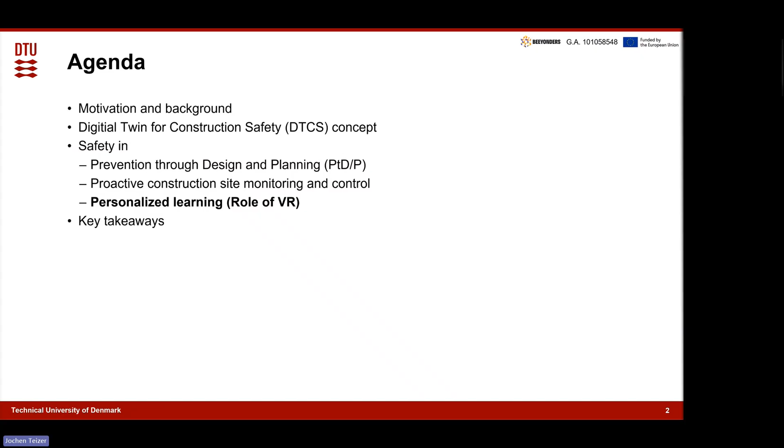Agenda. I go a little bit into motivation and background. Then I introduce the digital twin for construction safety concept, because virtual reality is part of it, where we have three main components. One is prevention through design and planning, where we design out hazards. The second part is construction site monitoring and control, and we want to do that proactively. And not last but not least, maybe it's actually the first, we want to do personalized learning, and here virtual learning environments can certainly help us perform change. I think I will go into that. And then at the end, I have some key takeaways.

Motivation. Well, we all know that safety is very important, especially in construction. The construction industry is one of the worst industries to work for, since its work environments are very complex and very dynamic. Many of the accidents that occur, and I cite here the OSHA Fatal Four, it's falls from height, struck-by injuries like being struck by a load from above or from workers, being hit by a machine, caught in between, let's say being in a trench or other hazardous or confined workspaces, and electrocutions. And the list can go on and on and on.

The industry, as well as research, has focused a lot in the past decades on lagging indicators. These are recording safety statistics, basically reacting passively upon happenings. We call them incidents, and these incidents are being followed up with. But it's too late—somebody got injured or even killed. It's simply too late for us to take proactive measures.

And that's why the industry has slowly moved towards looking into close calls. That was about 20 years ago. Close calls—recording also events that almost lead to an injury or fatality, and preventing those. And even now, the focus is continuing to be on high energy control assessment.

This means watching out for the impact of the force that hits a worker eventually. And the reason why this is shifting towards high energy control assessment is simple: we haven't reached the zero accident goal yet. You can see this here in the bottom of the curve.

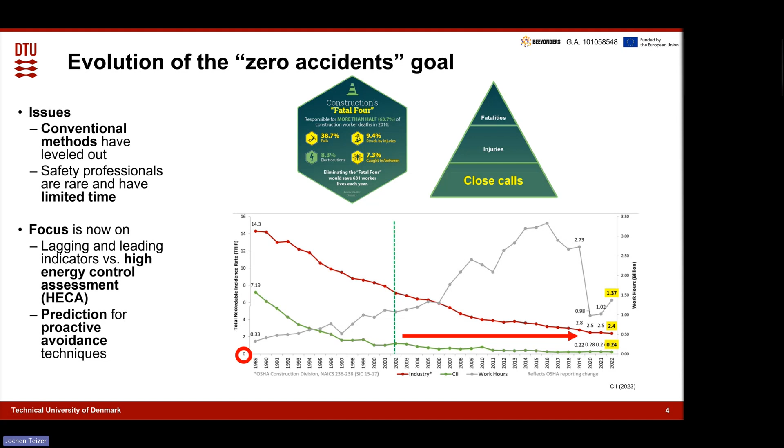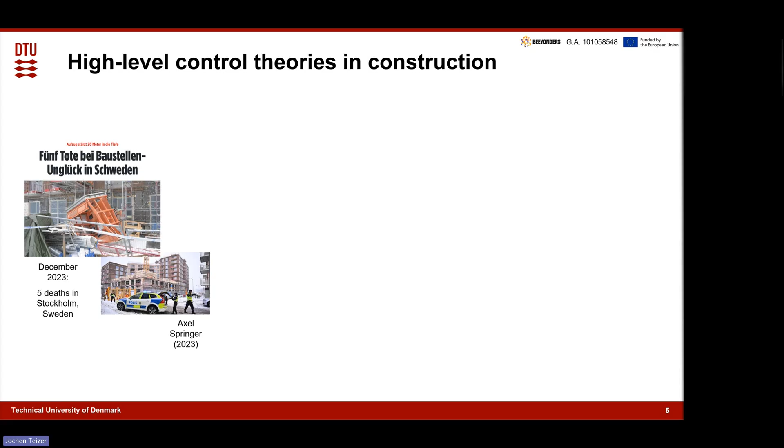Anyway, so that sets the base. I give you a couple of examples of accidents in the Nordics—well, actually also one in Germany, almost the Nordics. The Nordics are performing typically very well in safety, even though the construction industry is relatively small. But tragic events happen, and things have to change, right?

Typically what the industry applies is the high-level control theories. They have been around for 30, 40 years now, and they basically say we need a cultural change—the CEO at the top approving and going all the way down to the worker level, providing safe worker training and safe site conditions.

And yet it is not where it should be, and that's where I added this layer of protection. You may think of these as slices of Swiss cheese, and each hole in the slice actually is an incident. The further you go down, these incidents decrease because the holes are covered. But yet, so far, as you have seen in the statistics, we haven't achieved the zero accident goal.

And I'm a firm believer—that's why I introduced about 20 years ago this level of digitalization. Reason had not foreseen that; he stopped at personal protective equipment, down in the hierarchy level at the very bottom on the site. But I believe digitalization can add another layer of protection, not erase all, but certainly assist us. Virtual reality, or training with VR, is a part of digitalization, where I also state that digitalization is seen as an enabler, but certainly not as a replacement of human skills.

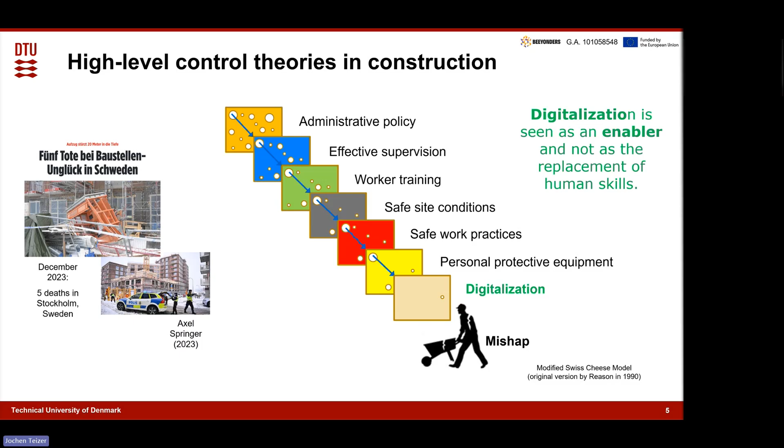So workers will not go away for the foreseeable future, probably 50 to 80 years. Yes, we will have automated construction sites similar to a factory plant environment that we see in the automotive or airline industry, but workers will always be there to assist. So we have to make those highly progressing work environments safe even when robots and other autonomous systems are in place, which is what BEYONDERS targets as well.

BEYONDERS has a teleoperated autonomous wheel loader, and here we have to take care and apply protective measures so workers don't get injured or killed.

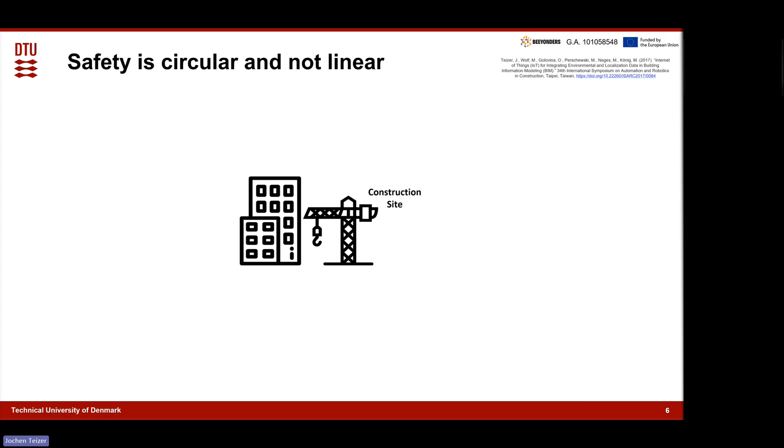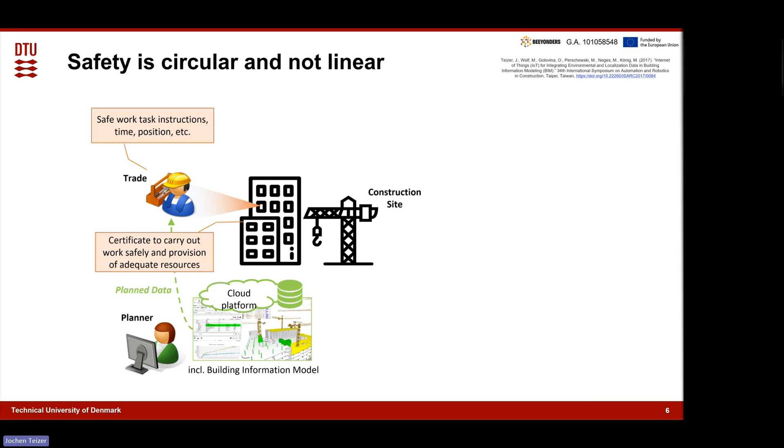Now, we have a construction site, just to introduce the framework a little bit. I'll do it quick, but we typically plan digitally on construction using building information models. Some of you are familiar with that. That information stored in these building information models can be given to trade workers. They can instruct them, and they can work accordingly, hopefully safely, on time, on schedule, with high quality.

And yet, even very modern construction sites have mobile devices where things can be reported, either the work progress or safety hazards. There's a well-known software company from Denmark that provides such easy-to-use mobile devices. You can see these are typically manual devices where you have to enter and fill out a form online, which is reported and linked to the BIM model.

Very nice, but still a lot of stuff happens manually. And yet, even though it's manual, the construction safety management or the construction management benefits from information that previously was not digitized or has been reported from the field, which is good.

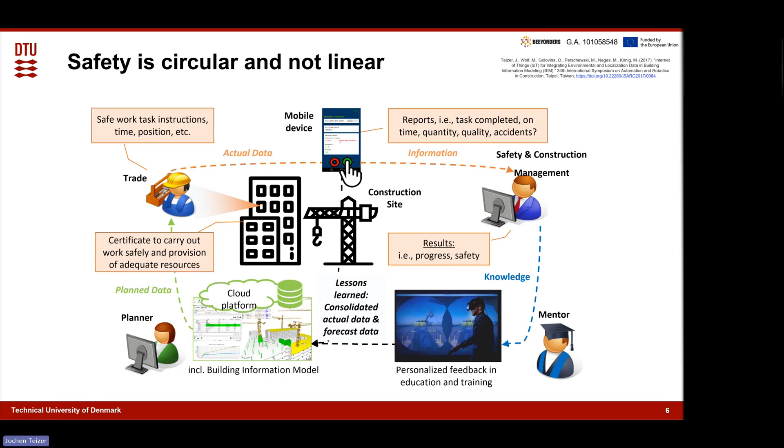And yet we're missing one important piece to round up the circle of information, because we want to go circular, right? Circular not just based on sustainability and materials, but also in terms of the flow of information. We also need to think about how we can advance learning environments, especially for construction safety and health and well-being. There are really good opportunities to close the loop and provide consolidated feedback that relates to the project, based on progress. I think that's a very good pathway to close the loop of information and make sure the next design of a building follows the lessons learned from the previous work sites.

I'll make it brief because I will show some examples. There is the digital twin platform that consists of 3 to 4 components. I think 2 of them can actually be combined. So let me talk about them individually.

One is very important: following the prevention through design and planning principle, which designs out hazards that we know usually would exist in the field. I will focus here on fall protection when I go into the examples. That could be almost seen as applying virtual reality, but not quite. But again, we design out hazards before they appear in the workplace—that is proactive in the design and planning phase of our project.

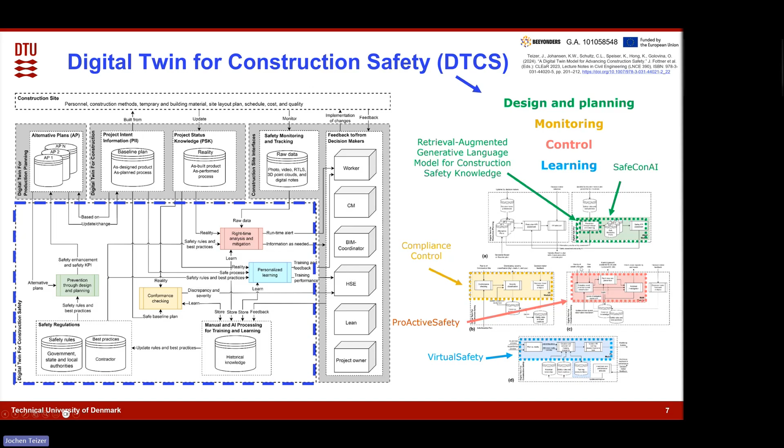Likewise, we have done in BEEYONDERS with some of the participating partners in building and road construction. I go into the first phase. Typically that's what you see wherever I travel around the world - I take photos of construction sites. That one I took in New Zealand.

People have, of course, a risk assessment and perform that just before they execute work. Here you can see they actually write down what the hazards are and how to mitigate them. And yet they use a physical board on the job site that is posted on the fence so everybody can see it, even visitors like me on a job site.

Again, there's an expert in place that does it. Typically, that person has a lot of knowledge versus the workers who once in a while get training. And again, that's already a bottleneck. We should probably provide them with more training and feedback than just once.

So here we have it - here we have a construction project. We have several stakeholders involved, in this case the workers and the safety manager, and they have domain knowledge, in particular this person here, and they need to apply rules and regulations. We can analyze them and put that into the digital representation of the job site.

And the term building information modeling came up already. I mean it's very early when we talk about BIM and safety. Actually, there's not that much safety in BIM that I wish there would be. But typically, if you follow this process here, we could create a digital representation of the work site before we start working. Let me give you an example.

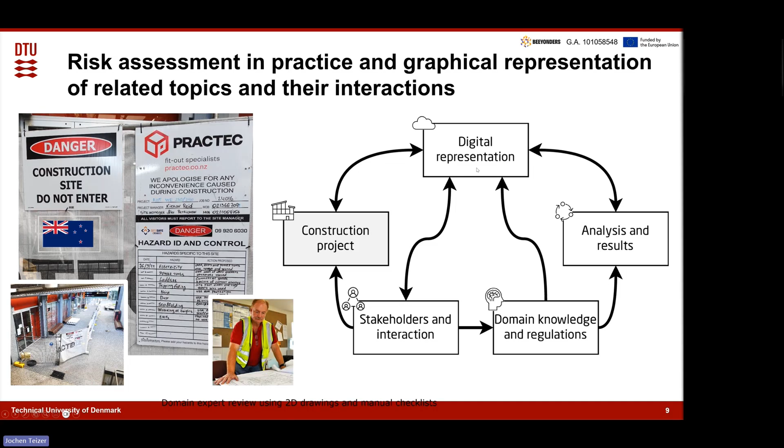Here we have the typical regulations on fall protection. There is code that we can code according to the regulation. For example, for a hole that is bigger than 5 centimeters, or for a leading edge on a work phase where you can drop almost 2 meters or more, you should install fall protection - a cover, a guardrail, or whatever. And it looks like that.

It depends on which country you are in. In the EU regulation, it would look like that, but in the US it would look slightly differently. Again, this may relate to international projects. Some of you have it, maybe some of you don't, but it may also add to confusion for the workforce that is traveling throughout the world.

Let's say in Europe, we currently build the Fehmarnbelt tunnel link between Germany and Denmark, and the workforce is 80% from Eastern Europe, most of them actually from Poland. And I believe they have very strong safety regulations, but when they come to Denmark, they may not know those in detail, even though both are in the European Union. So here updates would be useful.

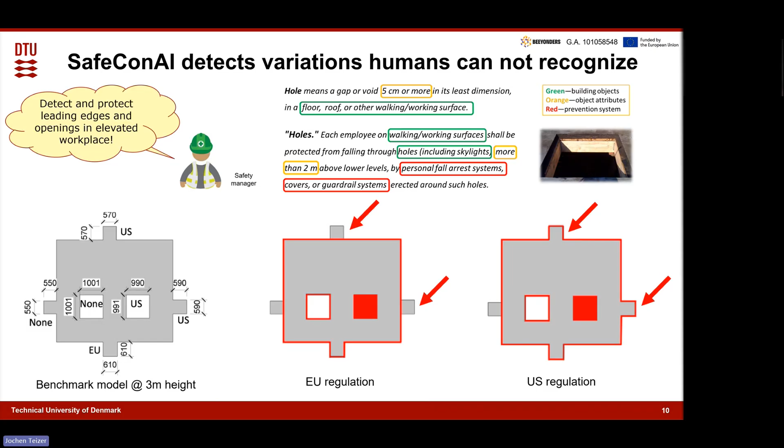Now let me show you what BIM and safety means in the prevention through design and planning phase. On the left, you see a BIM without safety. On the right, you see it. We simply run our code checker, our safety rule checker on the BIM model, and it creates the guardrails.

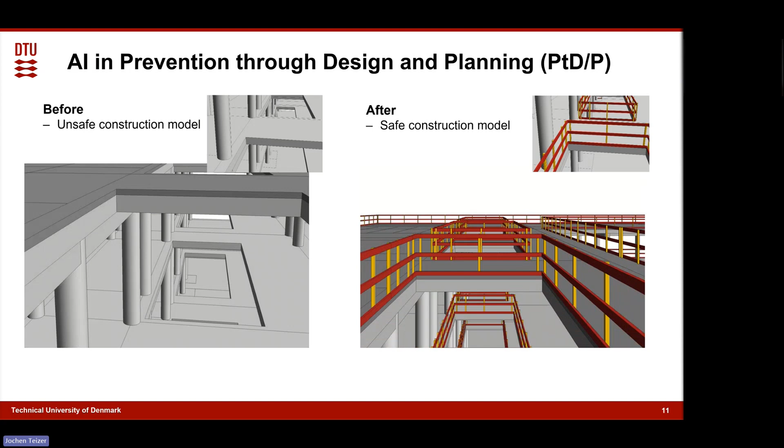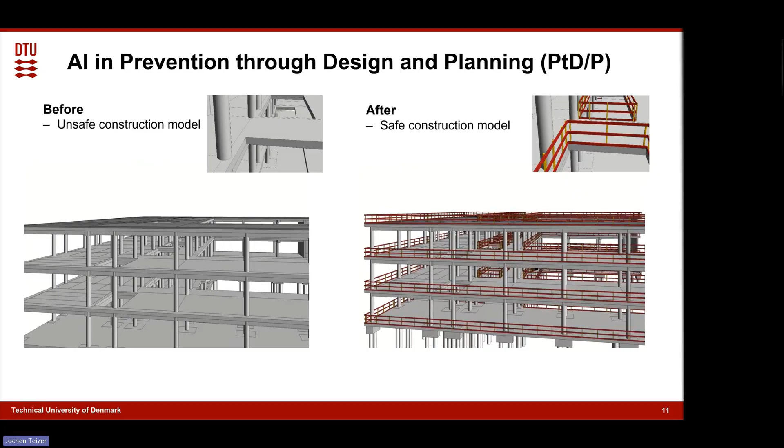That's it. And you can import that into the schedule. It provides a lot of value already about where and how to protect leading edges in this particular case. Once you tie that to the construction schedule, you see a bunch of things going up - this is actually the 7-story building going upwards.

But at the same time, we can tell you in what part of the schedule, the construction schedule, the guardrail needs to be implemented. They're saying red needs protection. And likewise, we can measure a KPI on the total length of guardrail.

Likewise, we can create alternative schedules, like a baseline plan using one crew. It would look like that, very uniform. If you add multiple crews to speed up your production, you actually would get such a schedule, and even that one could be optimized.

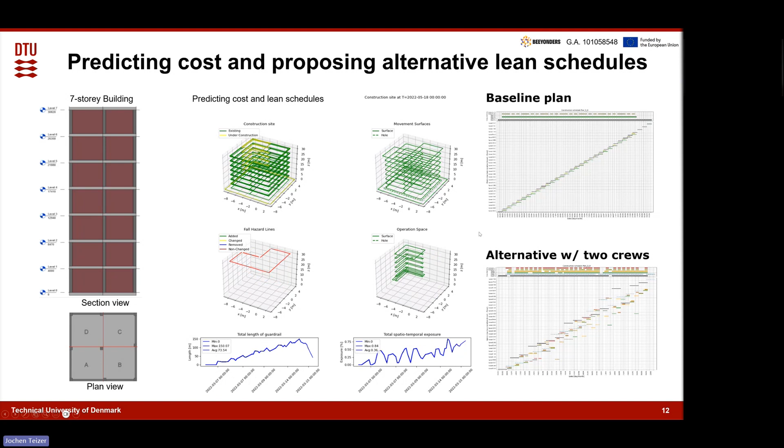So we have tools in place that can create not only a safe construction plan using BIM, but also a safe schedule. These are two important ingredients because we use them later on in our virtual reality-based training.

The SafeCon AI, I mean, we could call it AI, this very famous term, artificial intelligence. But here we have a tool that allows you to actually draw information from the digital twin platform and figure out, has it actually been installed as planned?

You can see it here. We left it usable for humans. Somebody draws by hand in this wearable device: there should be something, I'm missing something. So I've identified and located that position. Once you hit submit, it will find that safety element that is there.

Even though this is augmented reality in this particular case, it also relates to the extended reality concept, where you try to give people in the field feedback as they requested. So this is drawing information from the digital twin platform, indicating that here is a guardrail element missing.

By the way, all of these experiments were done under supervision, so none of the students that actually developed the technology gets harmed. You can see here there was a scaffold just below, just in case somebody would get close, that would be a protection for them.

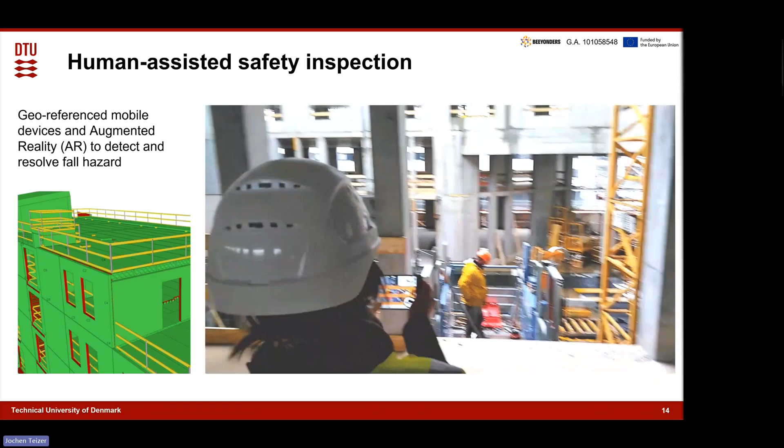Okay, good, this is really good stuff. If you think going away, flying with drones, everybody likes that. I hope people don't do bad things with drones. But we can actually record information, and this is done with our partner in the BEEYONDERS project from Finland, Fira. You can see here we fly with drones.

We create point clouds, and these point clouds get analyzed by computational algorithms. We created at DTU to figure out whether these elements are in place or not, and yes, we can do it. For example, here on the left, we can see there's a guardrail element missing, there's the toe board missing, and there's the top board missing.

And that was implemented with live tests on a job site, again safely conducted. But when you fly with a drone, to make it brief, you can create point clouds from stitching all the photos or videos you collect, and analyzing these point clouds and linking them to your safe-designed BIM model allows you to figure out where modifications occurred or don't align with your model. Really cool stuff.

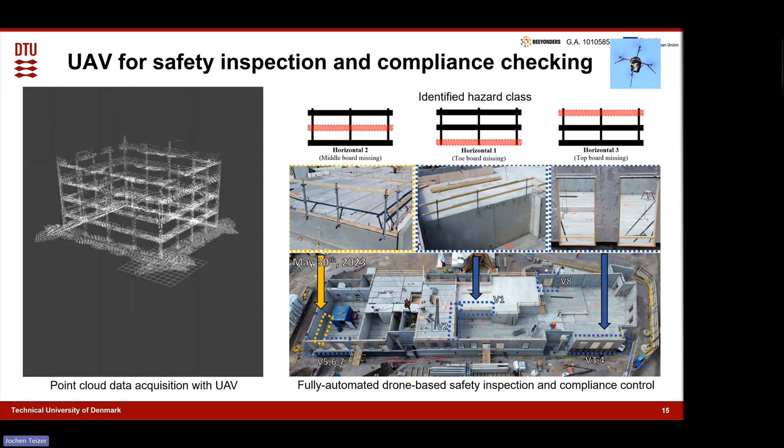I think that's ripe for a startup company that does that professionally. We would be happy to participate or share and collaborate with you.

Showing you a little bit what we do currently on our campus, similar to what we are doing in BEEYONDERS. We actually fly with drones. These are so-called Hoffmann blocks in Denmark, where we separate walkways from machines. Again, aligned with the BEEYONDERS project, our goal was to figure out whether these Hoffmann blocks are all in place where they should be, so we have a safe BIM layout.

That's the plan view of it. You see here the container, or the temporary offices on site. There's a walkway, and everywhere you see these dashed lines should be Hoffmann blocks. Again, this is drawn based on a BIM model, so don't think this is just a made-up figure. Actually, this is the plan view of a BIM model, the site layout plan.

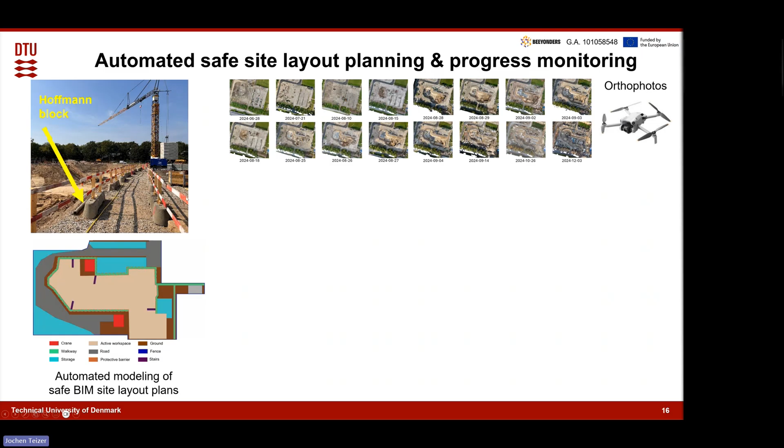Then we fly basically every week, at least once. And surprisingly, everybody loves to look at these images because they're so detailed, and yet nobody has the time to actually figure out how many Hoffmann blocks, protective guardrails, are in place to separate pedestrian walk patterns, walkways, from vehicles.

And here we apply our algorithm using labeling, standard techniques, it's not really that difficult. I highlight here a bit more where we see these Hoffmann blocks automatically detected. And as the excavation progresses, we see that they add step by step more, or modify them. This is existing technology, at least our algorithms. Again, it could be moved to the next level.

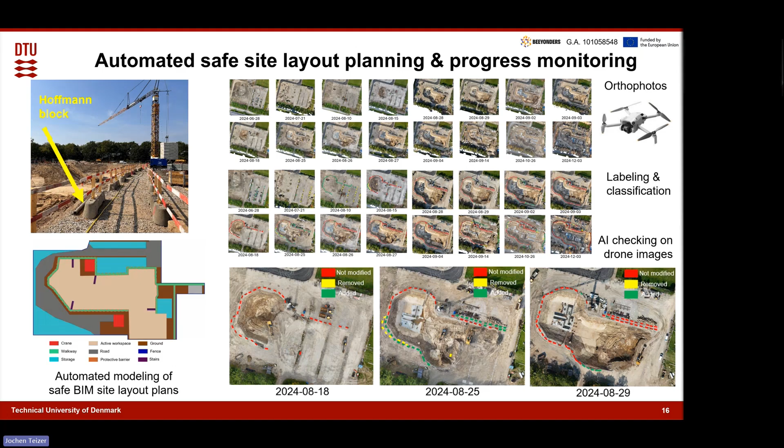Safety professionals in the field want this application because they want to know, just before going into a safety meeting, what has changed on the job site. They don't have time to look at everything, but drones and AI applied to photos or orthomosaic images can give them relevant information by processing the data. I think that's one good thing to help improve their decision making.

You're all aware of AI and have seen many applications. I must admit, some of the stuff I show here is 15 years old, at least in this slide, where others are still fascinated about AI, but it has been around for a long time. We have written papers on using vision to detect walkers below crane loads, or using wireless technology to track walkers in the field. Yes, there's a whole bunch to respect in terms of GDPR and privacy rights, completely understood. And yet in research at universities, we like to explore the boundaries and let others add their comments on what is doable and feasible.

We can really nicely see that the crane load is swinging over walkers where it should not, and we can log these events. You can't record the faces of the walkers here, but you can record their trajectories, linking it to the visibility of the tower crane operator. In this particular situation, the walkers actually went through blind spots that the operator could not see. A very interesting concept.

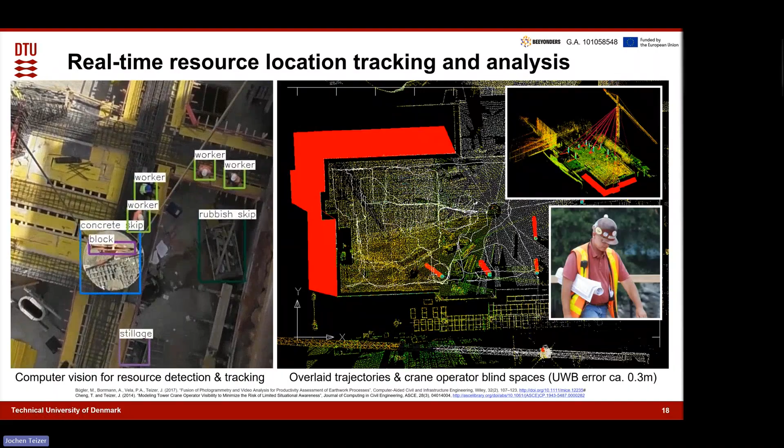At some point, you will see such technologies appear on job sites doing real-time monitoring. There's no doubt it has to happen just to protect the workforce. I took this video just to introduce you to the next topic, where we go into real-time alerting and monitoring.

This is a video I took. I was on the phone, sorry for the shaking, because I had to tell the guy to stop talking, I needed to take this video. But this is what happens typically on job sites: there's a formwork element spinning due to high wind loads in the field, and luckily nothing happened when this thing dropped, but it was a very dangerous situation.

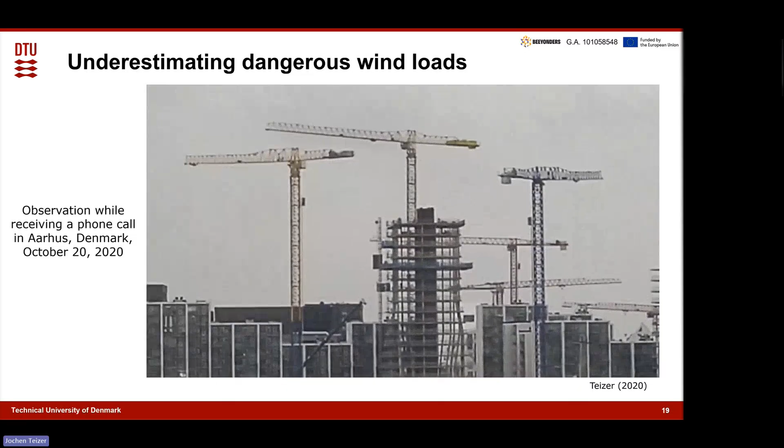That triggered the moment in the BEEYONDERS project for me to investigate this a bit more. Luckily, we had our partner from Finland on board, and we investigated dangerous situations where walkers could be below crane loads.

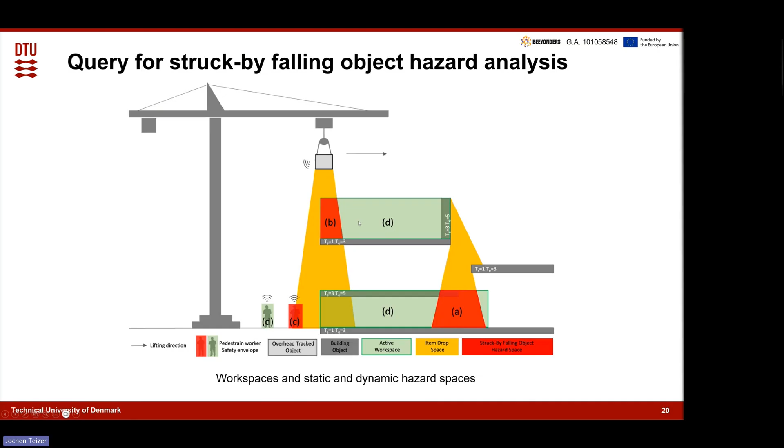It all relates to building information modeling, because BIM models have these 3D object representations in place. We know when and how elements get built, and we also know, by the room element, where active work will happen. Then we can measure whether we have crane swings over those active workspaces or not. If they do, we want to prevent it first of all. But if they do, are only those people allowed to be there actually there? And if not, can we detect and monitor it? That's what we have been doing.

Sorry, it sounds a bit complicated, but we followed two approaches. One is vision-based cameras, similar to before, using labeling, detection and tracking. The other focused on RTK GNSS, very good for outdoor environments, especially horizontal projects, meaning infrastructure projects. Here we applied RTK GNSS, which is nothing else than high precision GPS, in the field of building construction.

In the BEEYONDERS project, we looked at the building construction case and investigated whether we can track prefabricated building elements, because they are very dominant in the Nordic countries. You can see here the crane swinging, and we have a virtual cylinder around the crane load, and we see right away that there are two walkers below. Actually, only one of them should be there, the rigger, who puts the element into place. The other one could have left the area a bit earlier after putting the grouting down for the prefabricated element.

So a lot can be seen by visualizing data. Some people may refer to that as virtual reality, but in fact it is not. This is just superimposed data from the field, from the IoT sensors, on top of a building information model. You see here the building information model enriched with this information.

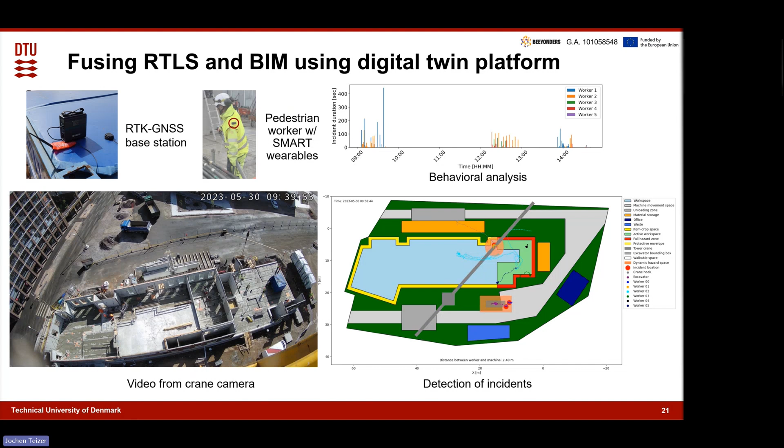I will relate to this incident later again when we go into virtual reality. Sorry for having such a big review ahead of time, but you need to see the complexity of our virtual reality environment. Here's another result.

You see here such an element being lifted. We can identify on the job where these load swings over workers happen. Some people refer to this as not real anymore, but it's definitely a sort of extended reality. You can localize that and think about how to make crane swings safer with all this information. The blue lines here are the crane swings, and when they go over workers, we create a circle.

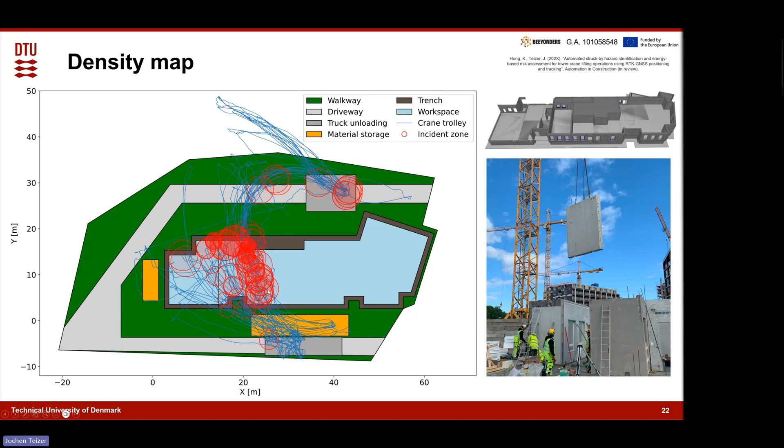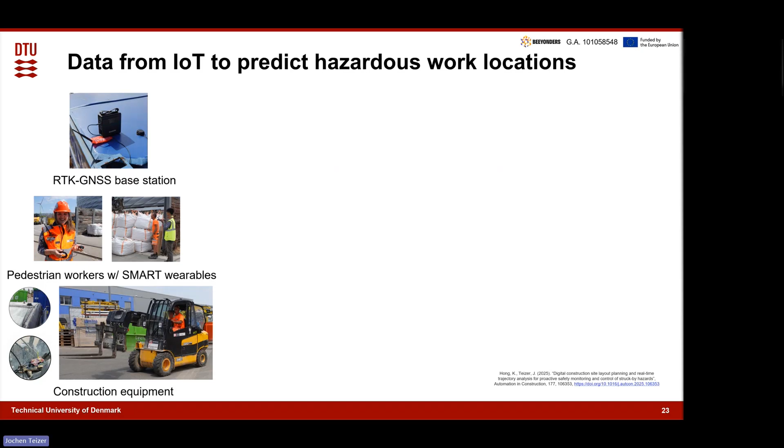You see a lot of stuff happening here, even though the job site didn't look that busy. This is just qualitative analysis, by the way—there's very little quantitative data I'm showing you, but I want to show this is also possible in horizontal cases. This was a different project, but it very much relates to the road construction use case in BEEYONDERS. We can collect so much data about being 1 meter distance to the machine and following blind space diagrams.

There's a whole other presentation I need to give, but all these trajectories can be linked to the trajectories of the vehicles. In this plan view of the job site, the green areas are the walkable areas workers are supposed to take, but you see they're deviating from it. Likewise, the machines also deviate and go into areas where they shouldn't. Then we can actually start predicting which areas of the job site have very close interactions and whether something is going on.

You can see this here—this is the spot. The walkway designated for the workers is not wide enough, so our recommendation to the people in the field was to make it wider, add another 2 meters. It wouldn't limit productivity, but it would start preventing these close interactions between the walking pedestrian workforce and the equipment traversing the job site.

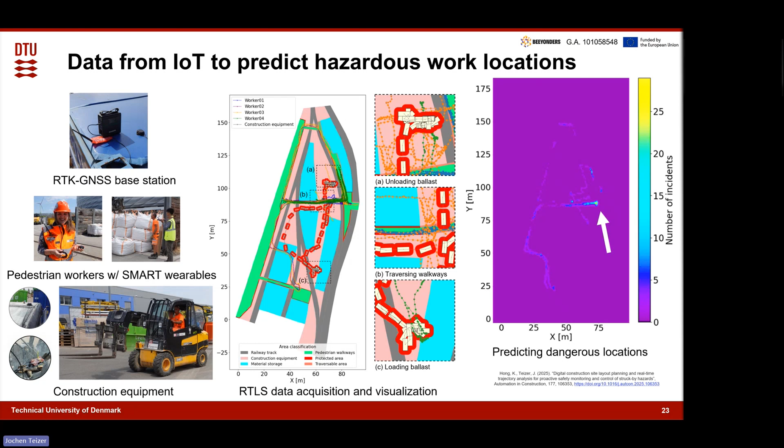You can imagine this machine was going back and forth many times to load rail cars for a subway rehabilitation project. Here, as part of a digital twin, we can predict—we shouldn't just shadow data, we should actually predict locations and get rid of them, preventing future incidents that are likely to happen.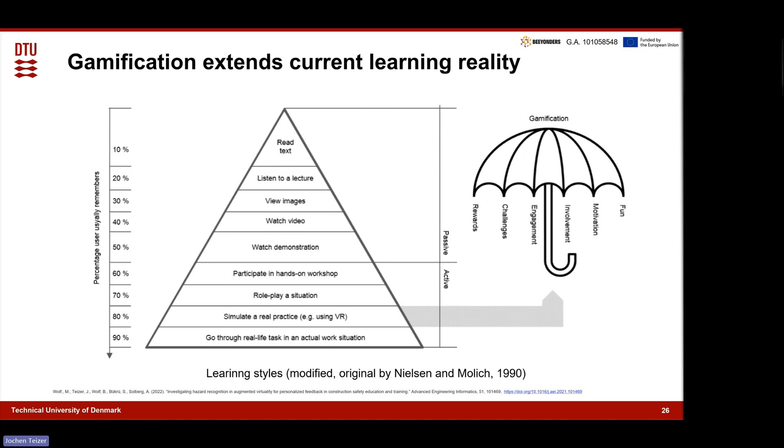I hope this is not too fast, because I have to move quickly now to virtual reality. What you can see here is the learning triangle, the learning pyramid. Of course, we want to go into gamification because it's much more fun to actively play instead of listening to a lecture like I give here or reading text.

The question is, where are you? Are you doing toolbox meetings? Yes, you probably do—I have attended many of them, actually conducted. Or do you have on-site training like this great contractor I had in place where you have to tie off? Really nice, and yet I think there's more we can do at much less investment. I never talk about cost in safety; I talk about investment in safety.

And virtual training is actually a good thing. How does the virtual learning concept work? We have a virtual environment, maybe the gaming principle, and a hazard library, and all of them get bundled—I'm not going into the technical details here—into a construction safety game where predominantly the trainee interacts.

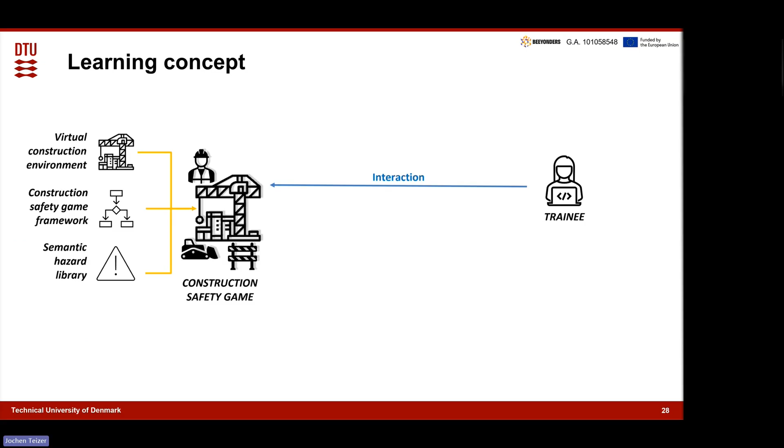And that's what we often see, right? People have a virtual learning environment for safety induction, and they have to pass certain events, then they get certified, and then they're allowed to go to the job site, or they have to recognize hazards. But that's relatively straightforward, and many of these things already exist.

What's more interesting is that the trainee gets individual and instant feedback, like a summary about performance. Most virtual reality safety training is for visualization purposes only, replaying videos, but very few give detailed objective feedback to trainees. The instructor also needs this feedback, not just for an individual trainee but for everybody in the group, since often multiple trades work on a job site, not just a single person. That feedback can be shared.

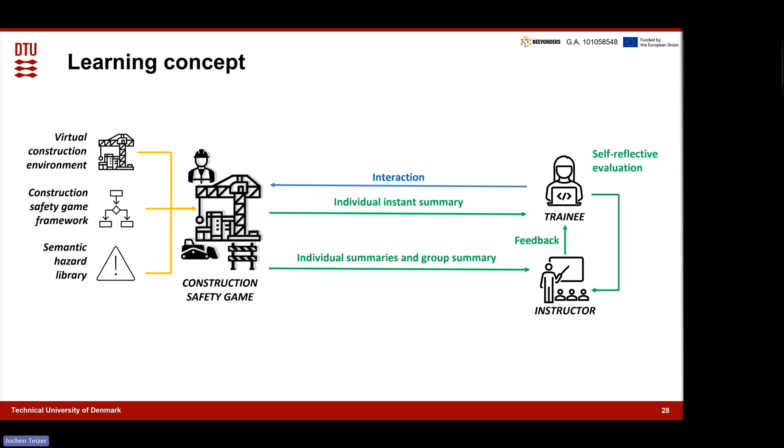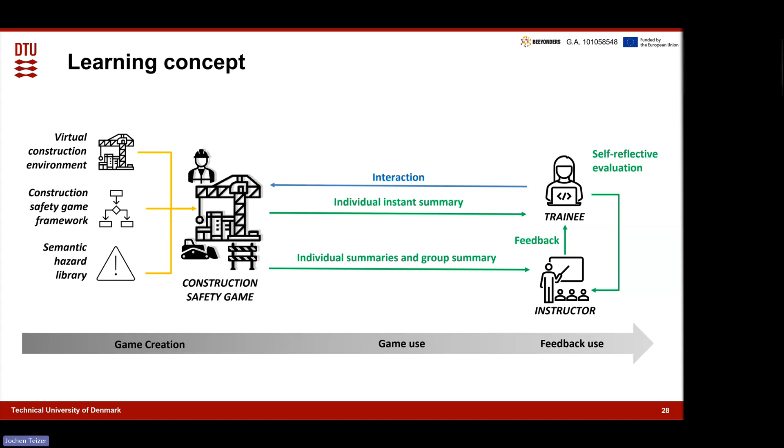Likewise, the trainee can provide self-reflective evaluation to the instructor, which makes creating a virtual reality game very interesting. So we had to create it, which relates to a lot of technical issues, and I'll go into that briefly. Then we use the game, and there's also this third component about sharing feedback.

Now here you see a game. It was created within a few months actually, because we had a very skilled person, Mario Wolf, who assisted me on this. Here is a nice little game that gives you hazard awareness, just to let you figure out if there are hazards in a place or not. You see here the scoring principle, it's based on reward. The higher you score, the better you perform. Eventually you can compete with others, and so on.

There's a lot of things you may at some point encounter on a job site, like a fire, or in the next situation things laying around but otherwise safe. Here's somebody cutting without using PPE, and you can recognize the hazard and provide feedback to the worker. Please don't take it for granted that everything implemented here is 100% correct. It depends highly on what virtual reality libraries are available, because we don't have the time and resources to do a lot of 3D modeling, like you see here with the helmet. We use existing assets to build the scene.

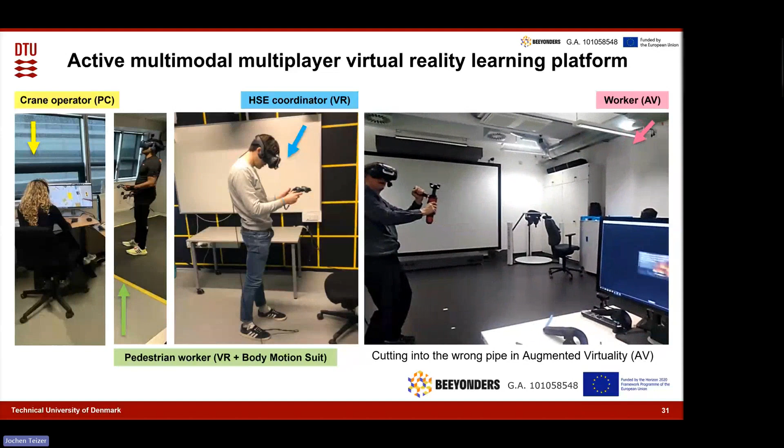We wrote a really nice journal article about this hazard training. You can see here, somebody should have shut off the valve before releasing the fluid, because it created an explosion. Coming back to the example with our project partner from Finland, we had the data from the field.

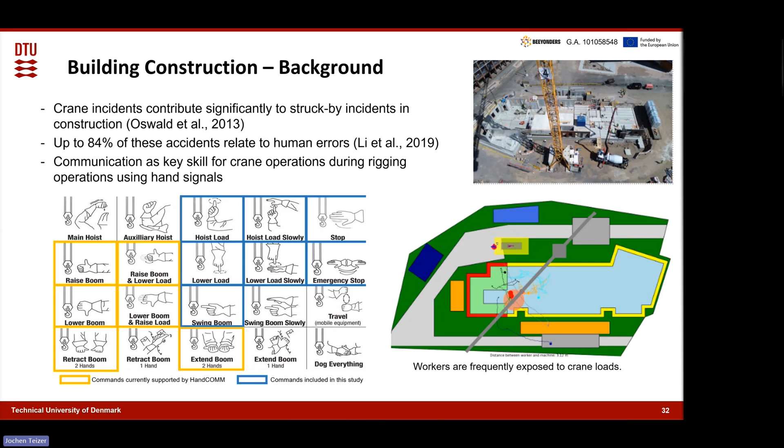We knew that signaling crane load swings is important, and all of this can be considered in a virtual learning environment. I'll jump ahead a bit quicker since you'll get the slides and recording later. Here you can see we are in this environment, with a crane operator working with a rigger, and we use this smart glove. Again, there are startup companies working with us on developing this and integrating it into virtuality.

When the rigger uses the smart glove indicating lowering the load, the crane operator lowers the boom and grabs the load. Likewise, the load is being lifted if the signal says hoist the load.

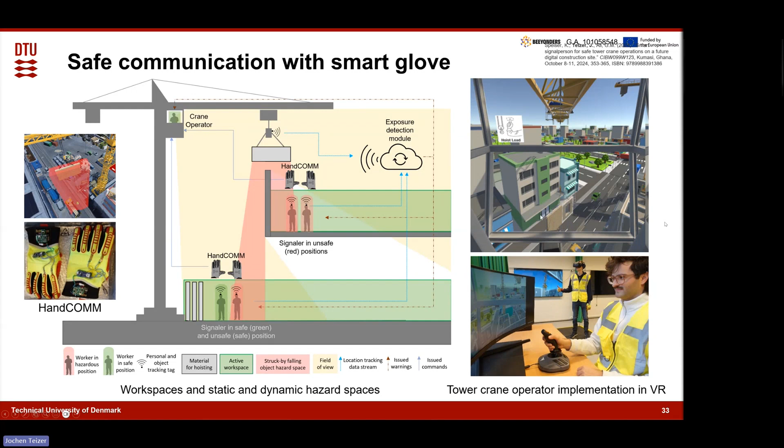I hope you have followed this. I know it's all fast. If not, contact me later and I'll share more detail.

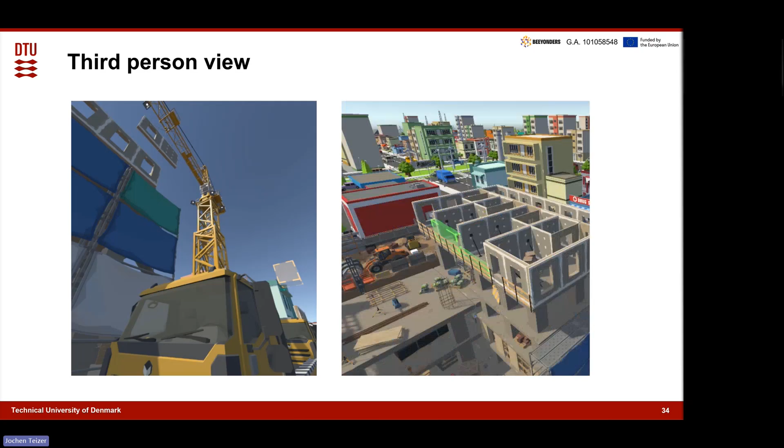You can see this here too: the load is being lowered, lifted, and put in place. This is the third-person view, probably what the trainee or trainer would take, just to document what has been going on at the job site.

Now, when we play with this, this is serious playing, right? Often people criticize me when I say playing because they think it's just fun. No, serious gameplay means there's a serious purpose behind it. We can actually detect and track in that safe virtual learning environment whether workers are exposed to crane loads or not, and yet no harm is happening to them, but we can show them like this.

Killian, I think, has done a phenomenal job keeping the feedback as simple as possible, saying okay, here the rigger is being exposed to the crane load. Maybe that person is stepping to a safe waiting area before the load is lifted. And up here, when the load is being placed, of course the workers should stay outside.

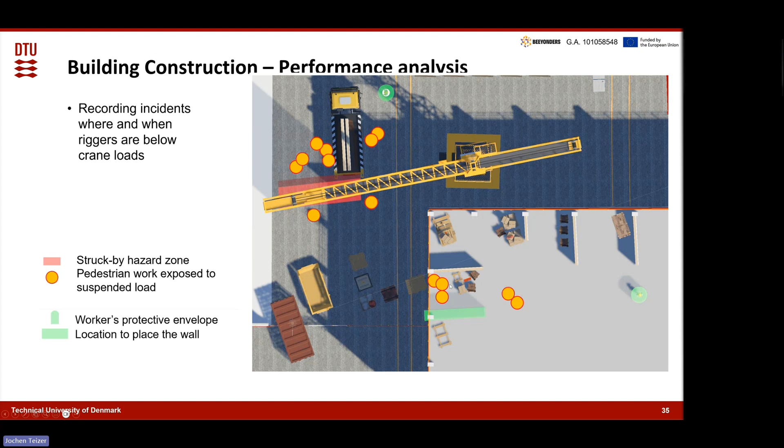Just to give you brief feedback, data can be recorded and analyzed. We know by the second what happened and how.

Killen came up with, okay, well, if communication could improve using this hand glove, the smart glove from the rigger, signaling maybe in blind lifts in particular, we could reduce the lift time by about 6%. And if you think about that, crane lifts are among the most significant and important tasks in a job that limit your productivity, then you can value this 6% increase a lot.

I must admit this is an academic measurement, and you may criticize academics that we are often very theoretical, but again, nothing hurts us from implementing that in the real world and validating it. So let's do it, right? Here's my proposal to you.

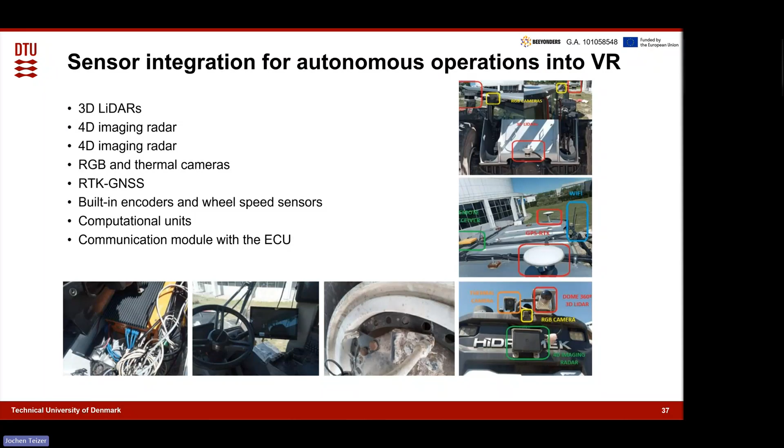Coming to Beyonders, to the teleoperated wheel loader, I think there are different webinars on this. I'm not going into depth, except that this machine and the sensors built onto it collect a lot of information. Some of that I've shown you already, but there's even more.

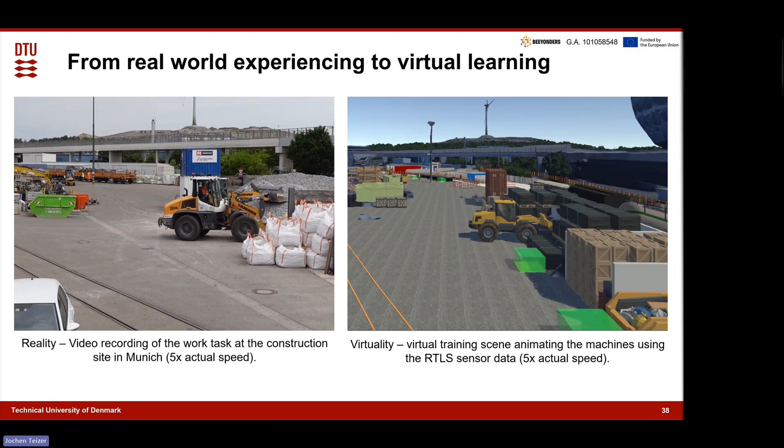Yeah, and sometimes I must give feedback or share results with you: people appreciate it if it's not as realistic, if it almost has the character of a comic. You all are probably familiar with cartoons and comics. Keeping it simplistic, not overwhelming them with what they see, and keeping it different from reality to make sure they understand that reality is serious, even more serious than virtual reality.

Okay, here again Killen has done a phenomenal job on a project related to a light rail project. Again, he has several participants playing, and I'm not repeating what I've said earlier, that we can show these locations and the times when these incidents occurred in virtual reality, where the worker stepped too close to the equipment.

What I want to rather focus on is that feedback does not necessarily have to be always negative or criticizing. No, there can be encouraging feedback, and virtual reality allows you to do that. In reality, on a real job site, it's very hard to monitor everybody because everybody's busy, especially safety inspectors that hardly have time or are called to visit and inspect a job site.

Like in virtual reality, you can encourage people: focus on this a bit more, focus on this a little bit less. And maybe we can even figure out what are the predominant hazards that people should focus on.

I can tell you maybe a couple of quantitative results that I don't have in my slides. It takes about 2.5 to 3 seconds to recognize a hazard. We have done tests comparing reality versus virtual reality, and it still is 2.5 to 3 seconds to recognize a hazard.

In virtual reality, even the best performer recognizes only two-thirds of the hazards. So there's a long way for those who are performing extremely poorly in a virtual learning environment to recognize above 30% of the hazards. Yeah, even the best performer recognized only two-thirds.

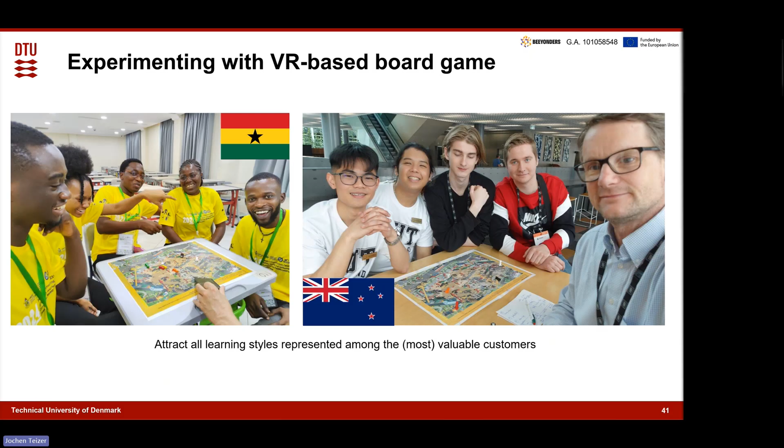That's just part of the game. It's really like almost a professional game you could commercialize. But again, we're academics, and so we want to improve society or the industry. We've played it in a lot of countries. These are just two examples where I was at conferences, and thanks to Beyonders, this was possible.

Finalizing thoughts, very quick: human factors and work environment matter a lot. Virtual reality has to include most of it. I don't have the time to explain this, I'm running out of time. But there's a long way still to go to create really good training environments.

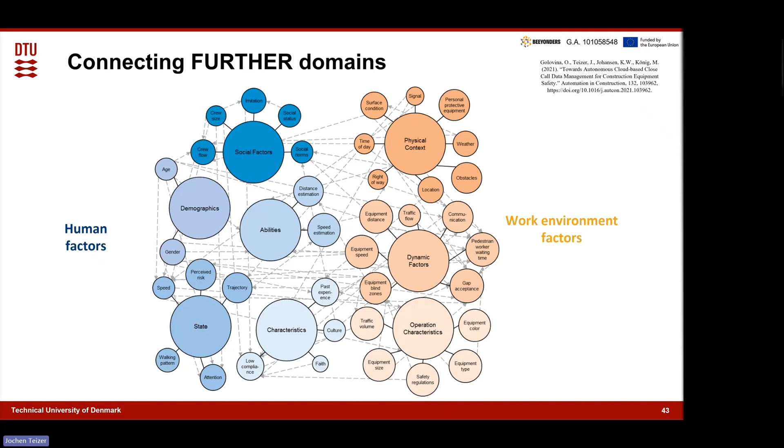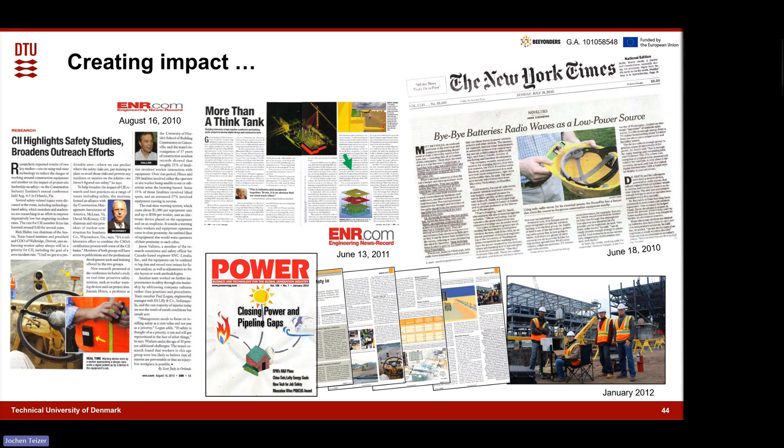Even though we may want to focus first on increasing the safety and health of the workers. I always say we have a three-step approach to transform the industry from linear, experience-based, and reactive towards circular. Circular, I mean the information. We need to go from experience to evidence.

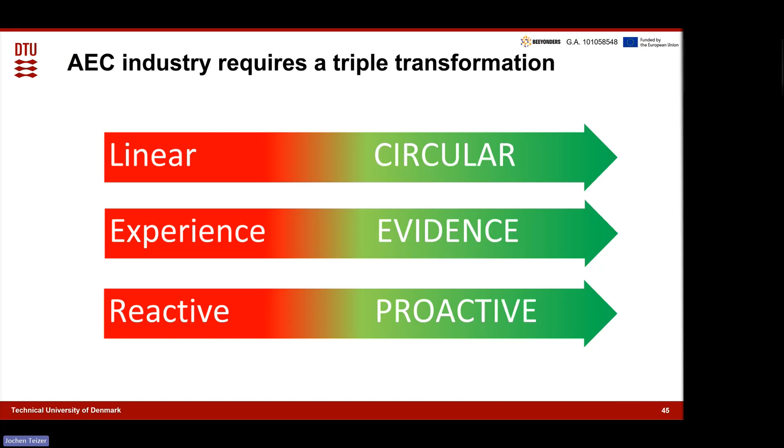We have a shrinking workforce. Virtual reality can help us create objective feedback and thus evidence of what behavioral changes are needed. We need to go from reactive to proactive, no question about it. We can't let workers into an unsafe work environment. That's why virtual learning and IoT and sensing can create such feedback.

While there's a lot of other stuff, I think this is the Bradley curve. It basically tells you what you need to do to go from an idea all the way down to going from technology and standard implementations to behavioral change. So it's a long road of journey.

We typically say it takes 15 to 20 years to implement a technology. So what you see coming out of BEEYONDERS probably will be in the field in about a decade or a bit more. Unfortunately, I started this 20 years ago, and yet I don't see some of my applications being commercialized or embedded, which makes me wonder a little bit.

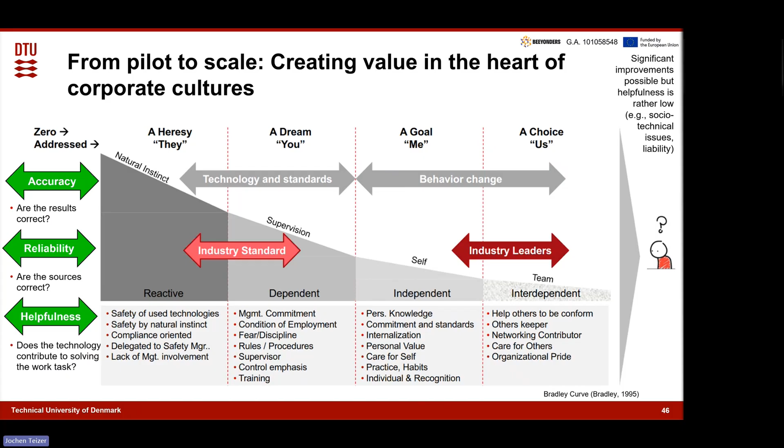But hey, a lot of people will focus on this topic, that's why you're here today too. So I'm not giving up. But what's important is: is the technology accurate? Like even virtual reality, is it reliable and is it helpful? I think these are the components I can relate to.

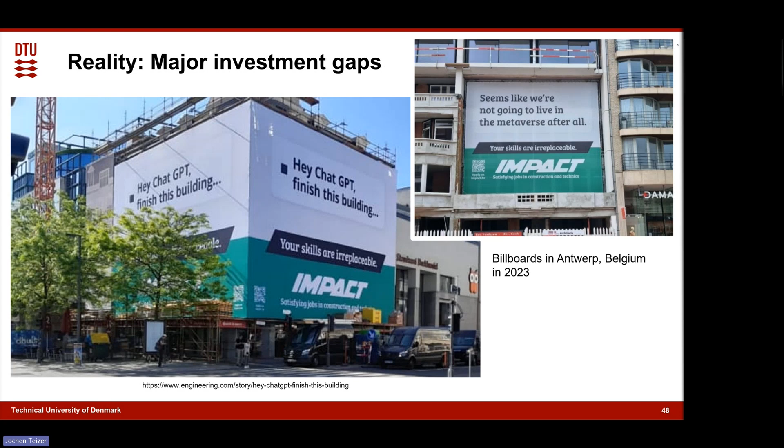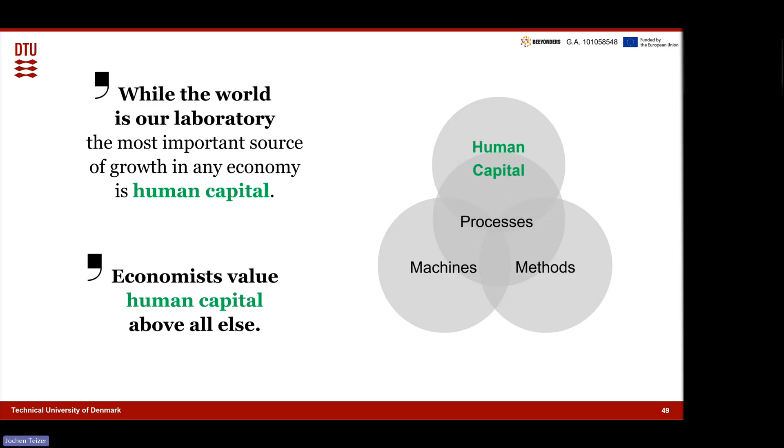We know this one, you've seen it many times. I don't think artificial intelligence will replace humans unless we automate the entire process, and then humans are not needed anymore, and we do something different. Yeah, fine. But yes, we as humans are really, really skilled, and long way. That's why economists always value human capital above anything else - neither machines, processes, nor methods. Human capital is the number one decision criteria in many of our businesses. The reason why we have so many incidents is because of human issues or human-related issues.

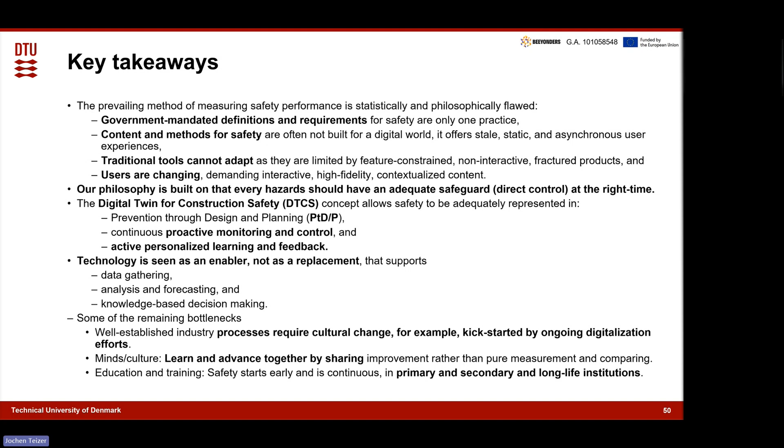Key takeaways, a lot of stuff to do - when you get the slides, you can read through that. Again, I see technology as an enabler, not as a replacement, and yet there's a long way to go that requires academic and industry collaborations. Thank you.